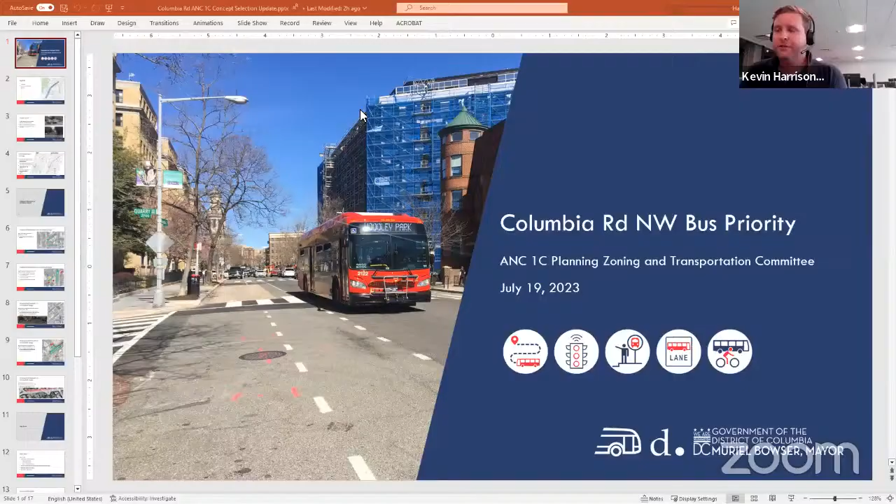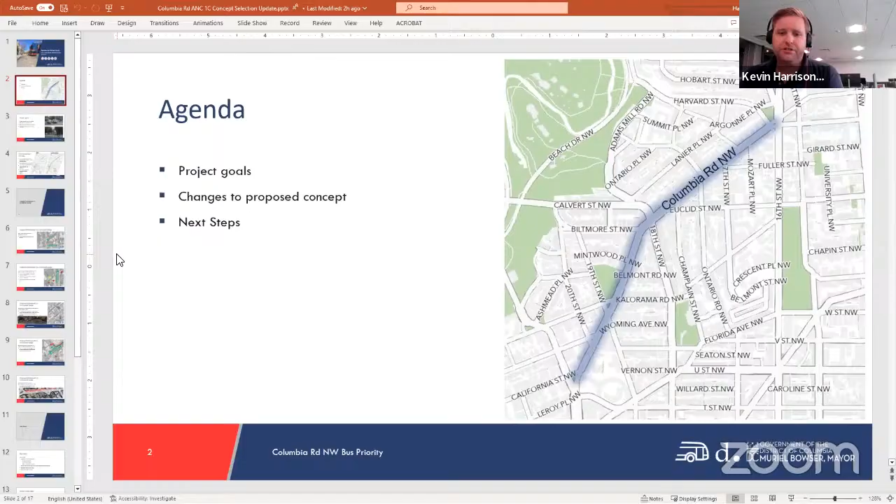So again, thanks for having me here this evening. I have a relatively short agenda for my presentation. Just want to reiterate the project goals. And the last time we spoke, DDOT was in the process of evaluating concepts. We've since selected a concept to move into design and then construction, and I wanted to provide an update on what's changed since then. For anybody who missed previous presentations, those are all available on the project website, and I encourage you to check those out for more information.

The first step in this project was a needs assessment in which we established what are the problems that we're trying to solve through this project, and what are the goals for this project. Something that we heard a lot through community feedback and through reviewing the crash records for all of the crashes that have occurred on Columbia Road was that people would like to see improved safety for vulnerable roadway users. When I talk about vulnerable roadway users, I'm generally referring to people walking and biking, because in every recorded crash involving them on Columbia Road, there was an injury that resulted. That's what makes them highly vulnerable.

Also, we want to reduce travel time for people riding the bus. The average travel time for buses through the corridor is less than 6 miles per hour. It's one of the slowest corridors in the district for bus riders, and they number about 6,000 people, between the various Metro bus lines plus the circulator line that run through this area.

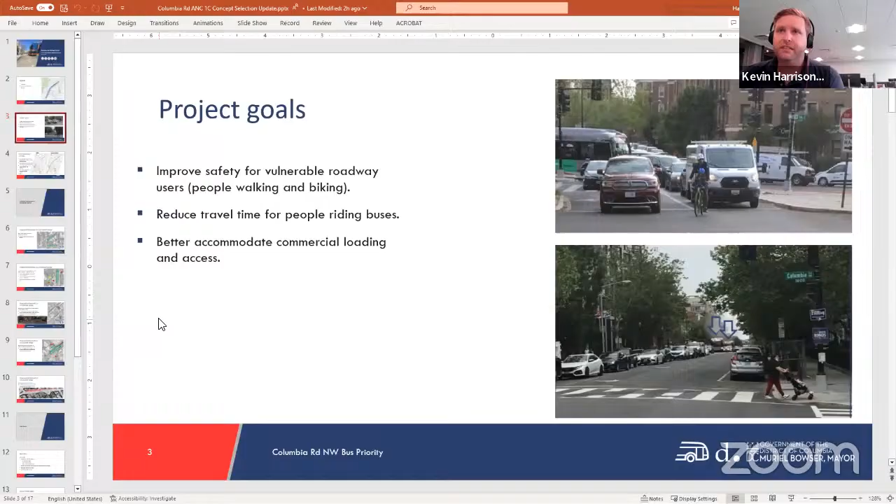The other thing is that we would like to better accommodate commercial loading and access through the corridor. Something that was also frequently cited in public feedback was that trucks unloading in the center of the roadway really limit visibility. There's at least one recorded crash in which a freight delivery person was hit by a car in the process of doing their job. So we want to make sure that, to the extent possible, there's space accessible for people who need to access businesses along the corridor.

A little preview in terms of proposed revisions to the design: there's some changes in the extents of that bus lane, but that's the general idea that we're moving forward with.

I wanted to provide some detail on some of the different refinements that we're proposing to the conceptual design at this point. We've done a lot more traffic analysis since the concepts were initially developed, and in selecting a concept to move forward, that was informed by some extensive traffic analysis.

One of the important things we wanted to look at is whether it would be feasible to have this protected bike lane connect all the way to 15th Street, where there's an existing bike facility. Making this connection between 16th and 15th Street would be important for completing this network connection. We're always working to expand the network of safe bicycle facilities in the district, and for the time being want to complete this connection. That was deemed feasible through our traffic analysis.

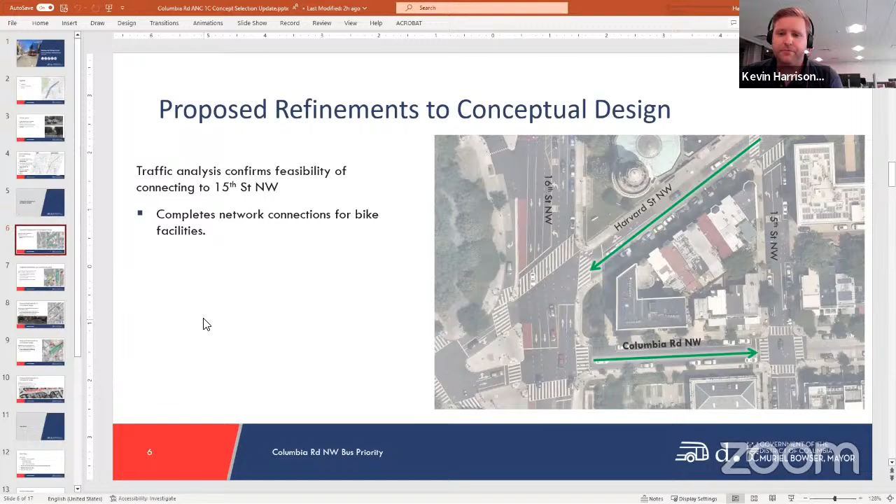However, it will have some parking impacts, so there will be more focused public feedback and outreach. That involves a neighboring ANC, ANC 1A, so we'll reach out to them and some of the properties along these two blocks.

The other thing we looked at was a major source of delay for buses making the left turn onto Little Harvard. Sorry, this is a little bit in the weeds, but I wanted to give you an update on what we've been working on.

The way Columbia Road works right now when heading east is that when 16th Street has green lights going north and south, there's a red light at Little Harvard, the little jog around the park that connects up to Mount Pleasant.

That's a red light, so you're not allowed to make a left turn there currently. We're proposing a permissive left turn at that intersection so there's no conflict with Columbia Road, since it's stopped, but people will be able to make the left turn watching for cars coming off of 16th Street. Right now there's often not a gap big enough for a bus to make a left turn there. So we're adding this permissive phase where there will be a flashing yellow arrow while Columbia Road has a red light, same as it does today.

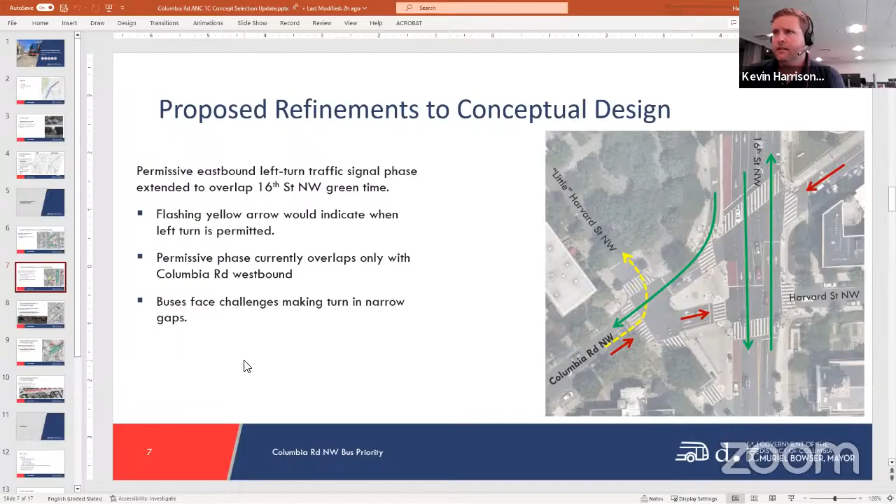One of the other things we're proposing at this point: south of Columbia Road, Ontario Road is one-way northbound, and on the north side of Columbia Road, Ontario Road is two-way. We are proposing to make it one-way northbound as well.

The reason for this is that it will simplify the intersection operations. Right now, because it's an offset intersection where the two sides of Ontario Road are not aligned, we can't run both sides at the same time in one signal phase. So we have to have a signal phase just for the south side of Ontario Road, and then another phase just for the north side.

If we make them both one-way, we can have one signal phase to let traffic move through Ontario Road. That will allow us to shorten the cycle and reduce wait times for pedestrians and people biking. Right now it's a confusing place to walk through because, as a pedestrian, you feel like you should be able to cross some of these streets, but it's unclear what the conflict is. Under this proposal, it would be a lot more clear.

Right now on the south side of Columbia Road on Ontario, you've got parking on both sides of the street, plus a contraflow bike lane so that you preserve circulation by bicycle. But for general purpose traffic, it'll be one-way northbound, and we would propose to do the same thing on the north side of Columbia Road.

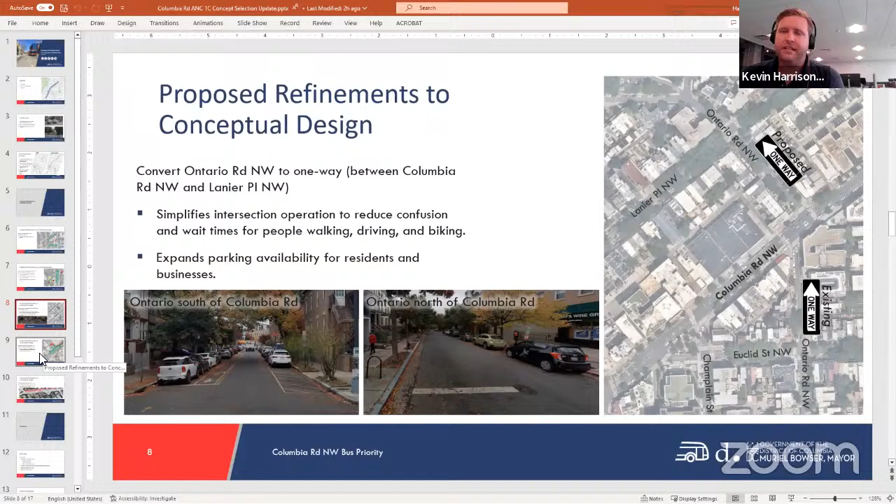Another refinement we're working on is also regarding traffic signals. What we're proposing is, at the intersection of 18th Street, Columbia Road, and Adams Mill Road on the north side of Columbia Road, to make it so that when Columbia Road has the walk sign for pedestrians crossing Adams Mill Road, and also when bicycles are able to cross Adams Mill Road, right turns will not be permitted.

Right now it's a permissive movement, it'll become a red arrow. You can currently make that right turn, you just have to yield to pedestrians. We are proposing to prohibit it so that there's less confusion.

That right turn will predominantly occur at the same time as Adams Mill southbound can make the left onto Columbia Road, similar to how it is now—they currently have that protected phase. But this will make it so that they're not also trying to get across while people are walking across the street.

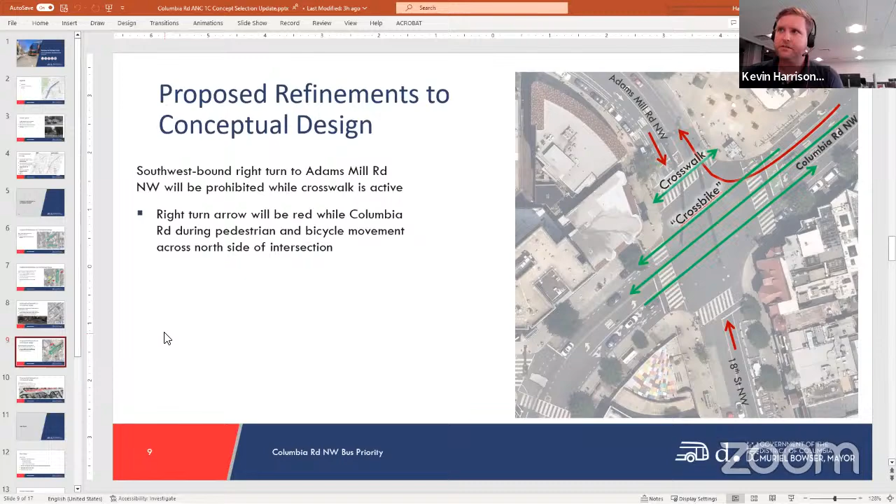One of the final major changes to the proposed design for Columbia Road is in the traffic analysis. We looked at how long the queues of traffic heading southwest on Columbia Road are expected to be in the future condition, and it's projected to be about 700 feet, which takes you back to between 20th Street and Wyoming Avenue.

So we are proposing to have that be the place where the shared bus and bike lane starts. What was previously proposed was at Kalorama Road, as you saw in that previous slide. But based on this analysis, it looks like we get the most bang for our buck by having it start at Wyoming.

I wanted to talk a little bit about what are the next steps for this project. Right now we're working on the 30% design, which is when a lot of the crucial things of particular interest to the public will be completed. In order to do that, we need to complete a roadway survey that will inform the drainage impacts and other things associated with this construction.

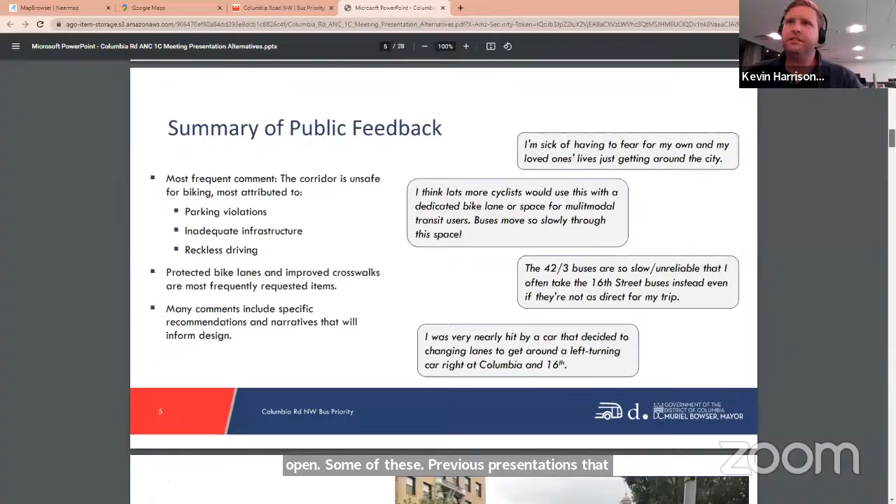Yeah, and while we're here, can you still see my screen, the Chrome browser? Yep, we got that. Okay, I was going to go ahead and open some of these previous presentations that provide more information on this. This is regarding the concept evaluation that we did.

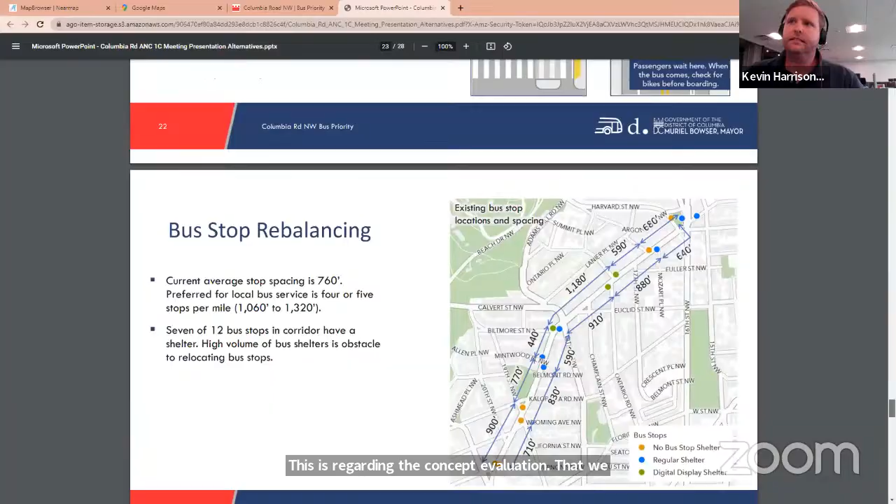And there's some information on the spacing between the bus stops on Columbia Road. What we're proposing as best practice for bus stop spacing in this sort of context with local bus service is under a quarter mile between each stop. A quarter of a mile is about 1,300 feet.

So we are still well within that maximum approximate range. Some of these stops are getting more spaced out. The longest distance, between 18th Street and 17th Street, is 1,270 feet. And the distance between the stop at Ontario and 16th Street is about 1,280. So it's within that threshold, and it's for good reasons relating to keeping up bus speed and reliability, and also taking into account where we already have bus shelters, trying to preserve those stops that will be near bus shelters and where there's next bus arrival information, to the extent possible.

Great, thank you. And just a couple more questions. One of the statements made by the Citizens Association was that the plan admits it will not decrease travel times through Adams Morgan by bus. But that is in fact one of the primary purposes of this plan, is it not—to decrease the travel time through the neighborhood by bus?

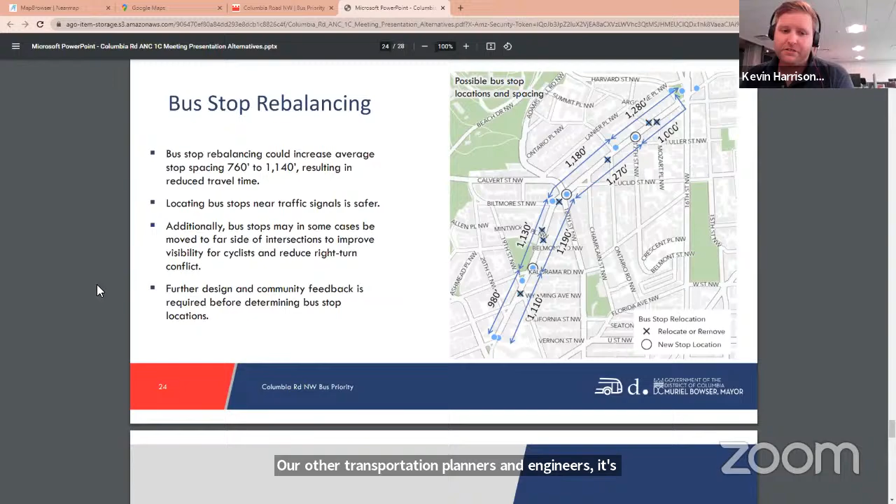I wish we could do more. It's severely congested between 18th Street and 17th Street as well. But in my experience and in the experience of our other transportation planners and engineers, it's very difficult to change the way freight loading happens on streets, and there's really not much opportunity to expand the bus lanes farther than where we have provided them.

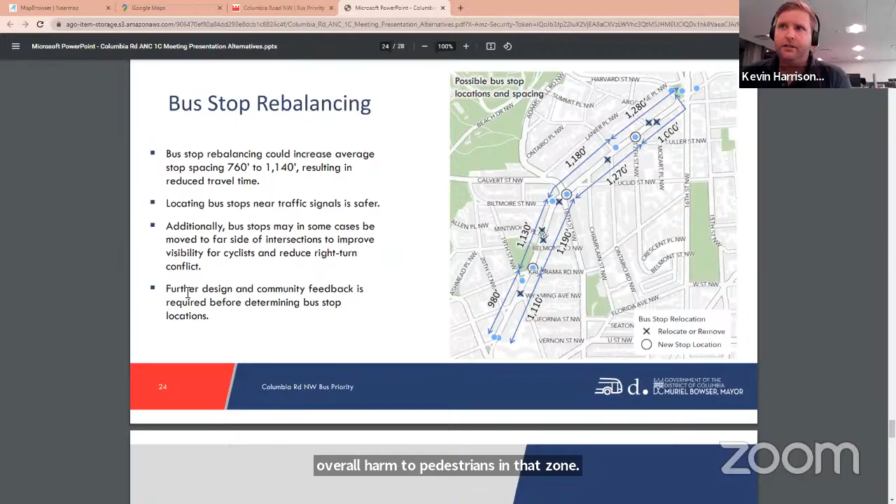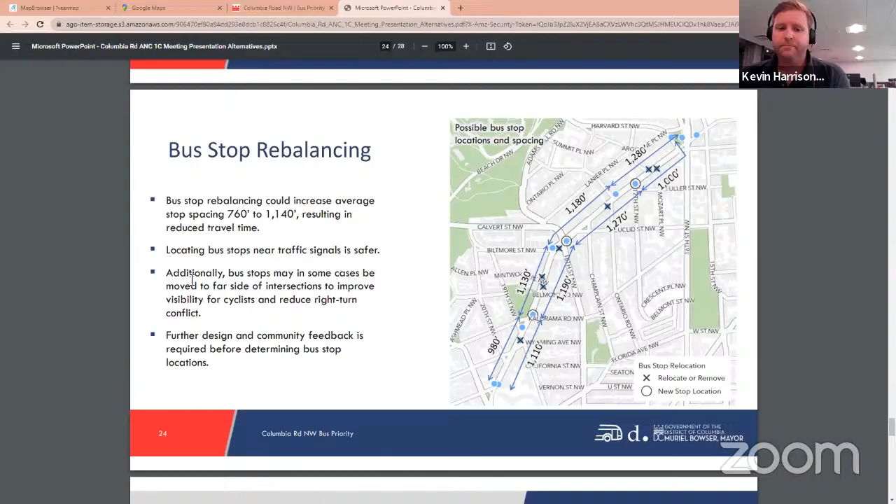Thanks, Kevin. One of the other comments is that the plan will put pedestrians at risk of collisions with bicyclists, scooters, and other personal mobility devices. Is there any evidence that where dedicated bike lanes have gone in the city, it has increased overall harm to pedestrians in that zone? There is not. In every city that has studied this, crashes go down—not just for people biking and on micromobility devices, but also for people driving and walking. In every study, it's reflected that the street becomes safer.

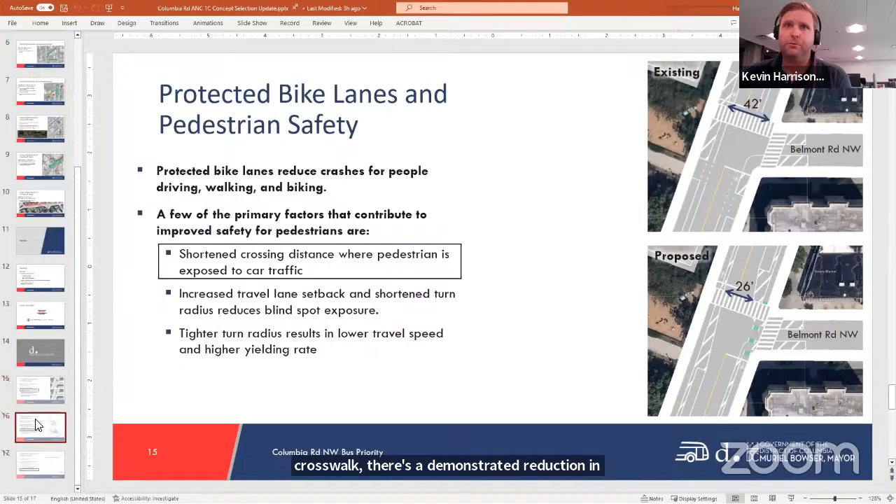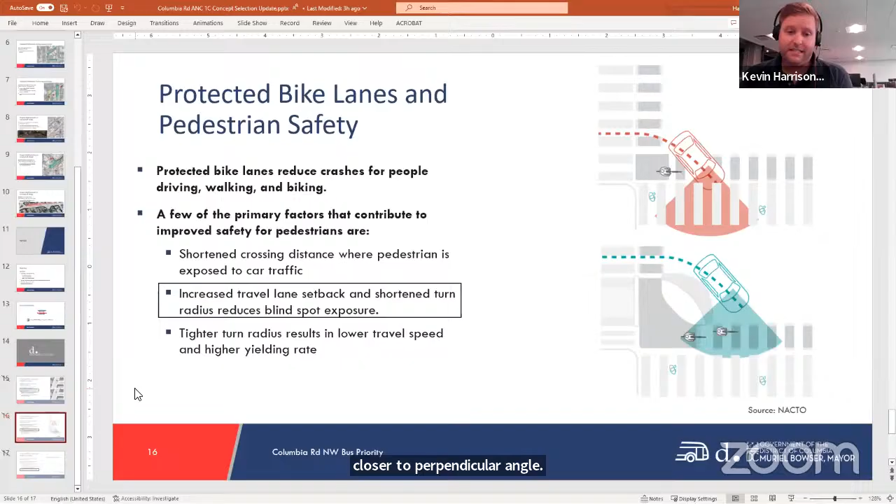The other thing is that the travel lane is set back farther from the crosswalk, so the car approaches the crosswalk at a closer to perpendicular angle. There's greater visibility of that crosswalk because it's making the turn from a greater distance from the side of it. And the other thing is that it results in tighter turn radiuses. When you shorten a turn radius, cars are going slower. And when cars are going slower, that alone reduces the probability of injury, and it also increases the rate of yielding—so you're less likely to have a car collide with a pedestrian or bicyclist in the first place.

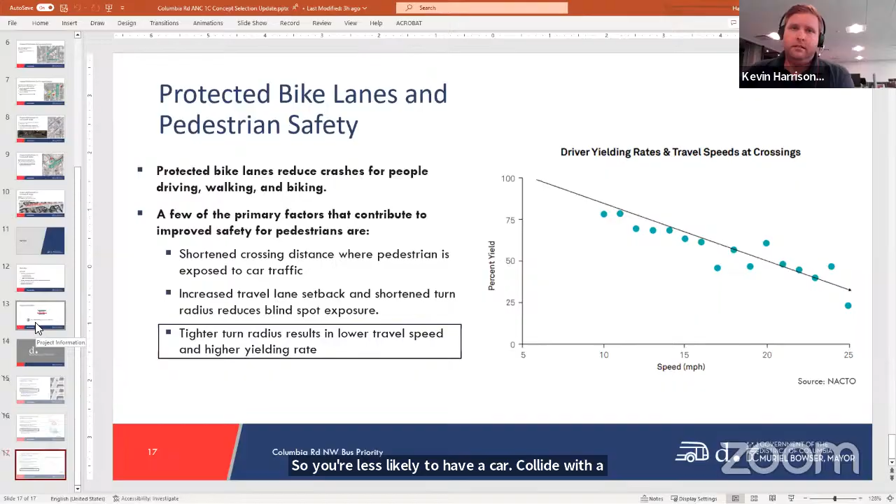Got it, thanks Kevin. So all the evidence tells us, at least the evidence that we have, is that this will increase pedestrian safety, increase the speed with which folks on buses can get through our neighborhood if they're taking public transit. We'll make it safer for people to ride bikes in our neighborhood and use that as their primary source of transportation. And we'll provide a very necessary east-west corridor through the city, linking various bike lanes together, which also happens to reduce our carbon footprint and meet many of our climate goals as a city, and will give us lots of opportunities to increase pedestrian safety along this corridor as well. Did I pretty much capture it there?

Yeah, I think so. Really emphasizing the safety aspect of this project. I recognize that there is high demand for parking in this area and that there is not much parking available. But we also have to acknowledge that there is a pattern of people on bikes and people walking being hit by cars. As the Department of Transportation, we have a responsibility to try to help that situation, even in places where there is a scarcity of parking.

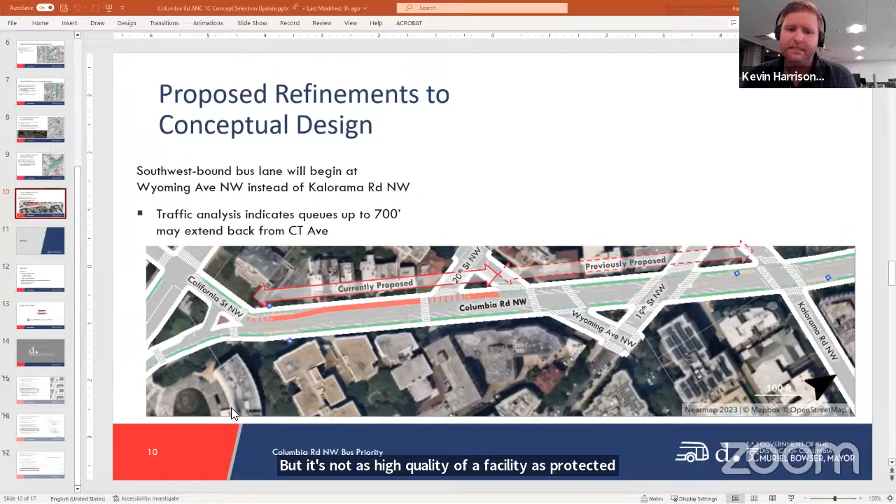The bus and bike lanes, I think people feel very comfortable in them, but it's not as high quality of a facility as a protected bike lane in terms of attracting users of all ages and all abilities. So that's a trade-off as well. We're watching this closely, and that's something we're working on in the coming months as we design this facility, determining exactly how long it's appropriate to build, or what is the appropriate length for this bus and bike lane.

I just want to make sure I understand the drawing here. On Columbia between California and Wyoming, will there be parking or areas for drop-offs or deliveries on either side? Sorry, between Wyoming and California, the stretch where it's effectively the shared bike bus lane.

So in this illustration — and this is conceptual design stuff, we haven't completed survey, the details are not final, but it's just illustrative — it does show parking on the northeast bound side of the street, pretty much existing condition, starting after the bus stop on the northeast bound side, which is the bottom of the screen. On the top of the screen, there's parking shown between Wyoming and 19th Street, but there is not parking between Wyoming and California Street.

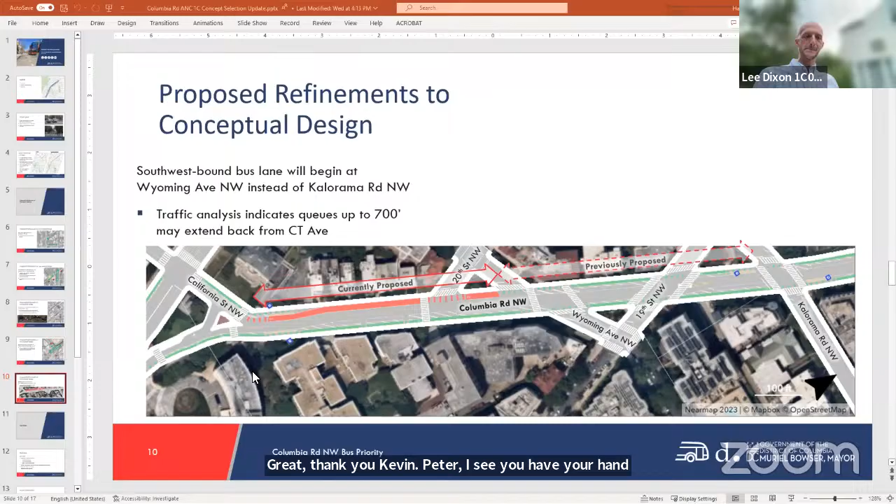Great, thank you. I wanted to raise a couple of things. One, on the southeast side of the road, the odd numbered blocks where the protected bike lane is proposed - our concern is that we're at 2006, and the alley runs between our building and the Schuyler Arms back to the Adams Oyster School. Our concern is that by pushing parked cars further out into Columbia Road, you're actually reducing visibility for traffic coming in and out of the alley. There are a lot of service vehicles for the school that come in and out, and heavy trash trucks that come back to the school and to the Wyoming. No loading is permitted in the alley, mind you, because it's a fire lane. So we have concerns, particularly for vehicles that have to back out into Columbia Road - their visibility will actually be obstructed by this, not improved. We need to take that into consideration.

Also, we'd like to know what is the plan for construction of this protected bike lane? Is it Jersey barriers? Is it flex posts? What's in mind here? All we see is a green line.

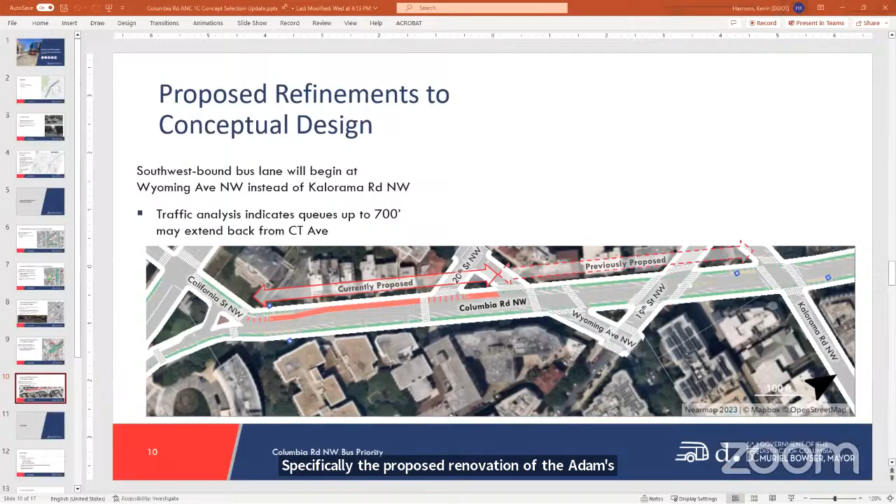Specifically, the proposed renovation of the Adams Oyster School and the redevelopment of the Universal North and South buildings. To our knowledge, no provisions have been made in the plans for either of those projects, or for this project, for adding any parking. So we're concerned where are construction workers going to park? Doing this project at the same time is going to make a bad situation even worse.

I appreciate you flagging that concern. As I mentioned, there's also additional construction coming next year on the Connecticut Avenue streetscape project. That's been called into question, hasn't it? I believe they're proceeding in 2024. There's also the Connecticut Avenue bike lane project farther north, north of Calvert, north of Woodley Park—that might be what you're thinking of. The one that's the deck over DuPont Circle, with protected bike lanes from DuPont Circle up to Columbia Road, should be proceeding next year.

When it comes time to schedule, we'll certainly be taking a look at all of that. This is a lighter lift. Our recommendation is that this be delayed for substantial rethinking and for consideration of that scheduling conflict. The thing about this project is it's considerably lighter construction—it's restriping primarily and using modular materials.

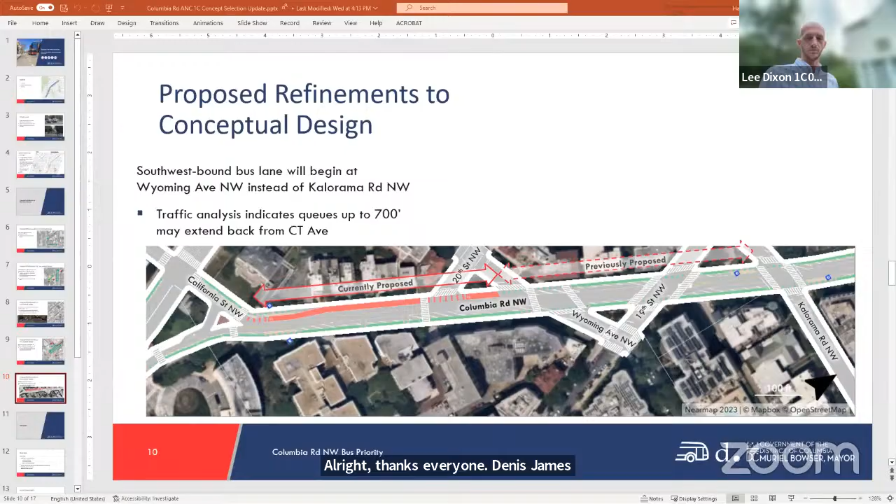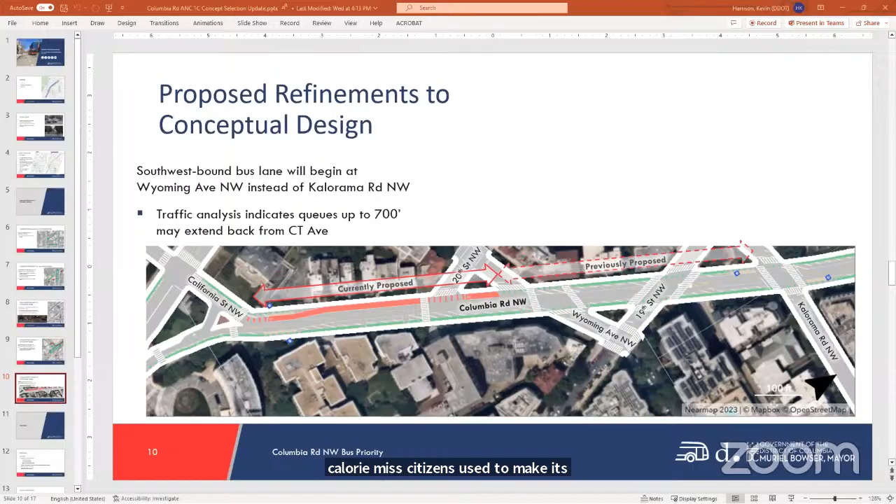So a question for Kevin, and I'd like to stay on after I hear his response. Actually, two points. Is it correct that pedestrians boarding buses will cross the bike lane to a concrete raised strip? And then, what is the situation on the commercial parts of Columbia Road between 16th and 18th? My understanding from your first set of plans, which the Kalorama citizens used to make its initial comments—which I posted today because I haven't seen any other plans until now—is that those businesses are going to be hard hit by removal of parking. You could be sentencing those small businesses to death by removing the ability for their customers to park near them, particularly the ones between Ontario and Champlain on the southwest, opposite Safeway and CVS. So that's two points I'd like to hear the answer to, and possibly make a response.

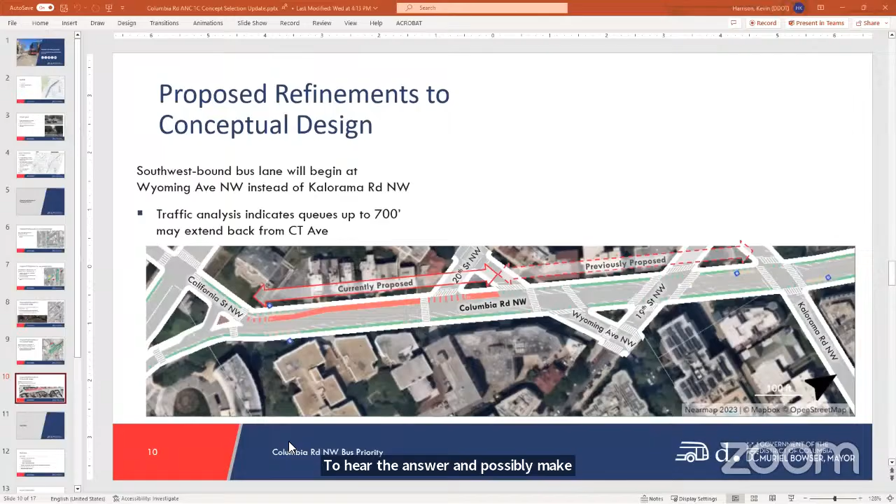Yes, these will most likely be what we refer to as shared stops, where the bike lane crosses the bus boarding area. It's a type of bus boarding platform we've been constructing in different parts of the district, and it's most likely what will be here. In terms of exactly what materials are used, that will be determined based on the survey that's going to be underway shortly.

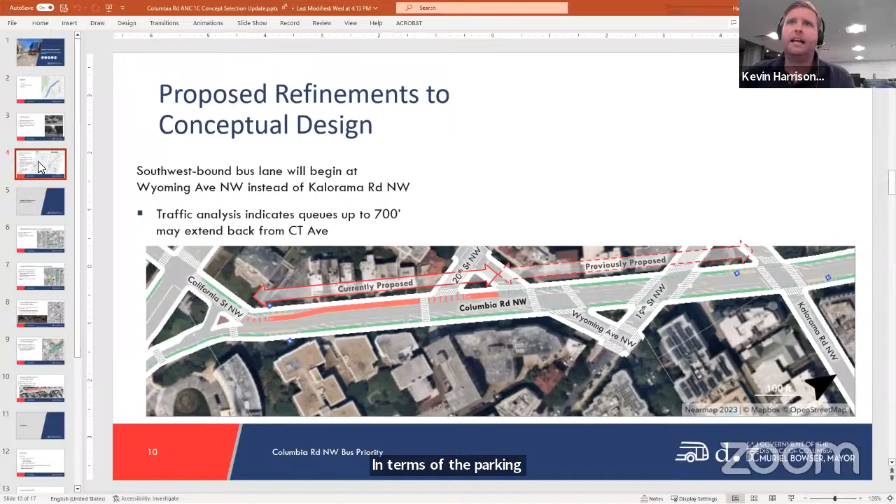In terms of the parking between 16th and—did you say 7th? I'm not sure which streets were your bounding streets for the question, but the proposal does remove parking between 17th Street and 16th Street. We're sensitive to the impacts of reduced parking along that stretch, and we're working with the business community on how best to accommodate their needs with curbside regulations on the remaining parking.

Okay, am I still being heard? Yes. Okay, thanks. So again, for Kevin—if I'm getting on a bus and a bicycle is coming along in the bike lane, what's going to make it stop? For me, especially with the idiotic rule the council passed, the so-called Idaho stop—say it's at a stop sign where the bus stop is located, or maybe a red light at a traffic signal—but perhaps the bicyclist can't see it because the bus is stopped right at the intersection. So it seems to me you're putting pedestrians at risk by making them cross the bike lane. And I've got to say, many bike riders are very entitled. They don't give a damn about anything—they just blast through stop signs and red lights all over the place, regardless of what's coming.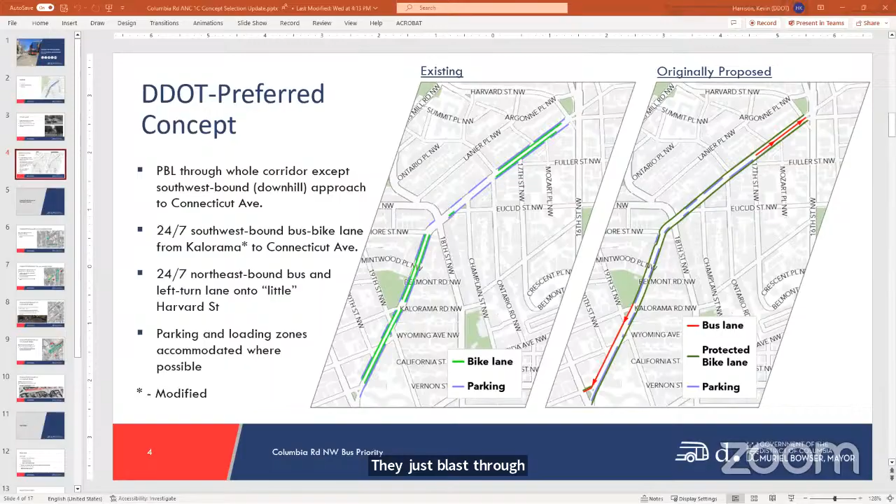Yeah, and that's a concern that we've heard from others as well. We've been attending meetings of the Accessibility Advisory Committee for WMATA, and also the equivalent for the district council, discussing the design for these shared bus stops with them. We've also been going out and doing observations, noting that this is something different than what's been constructed in the district before. At this point, our team has spent hundreds of hours actually making observations at these bus stops, taking seriously this concern that's been expressed. And there's actually very little interaction for the most part between people boarding and getting off of buses and people passing on bikes.

And that is the overwhelming thing. And then when there are those rare moments when somebody's trying to board a bus and a bike is passing at the same time, people get along and they yield to each other and they behave appropriately. We're posting signage at all of these locations, informing people that they need to stop for bicyclists. And there's also signage on both sides of the bike lane as you approach the bus stop, creating this gateway effect. There's a ramp up to slow down people on bikes.

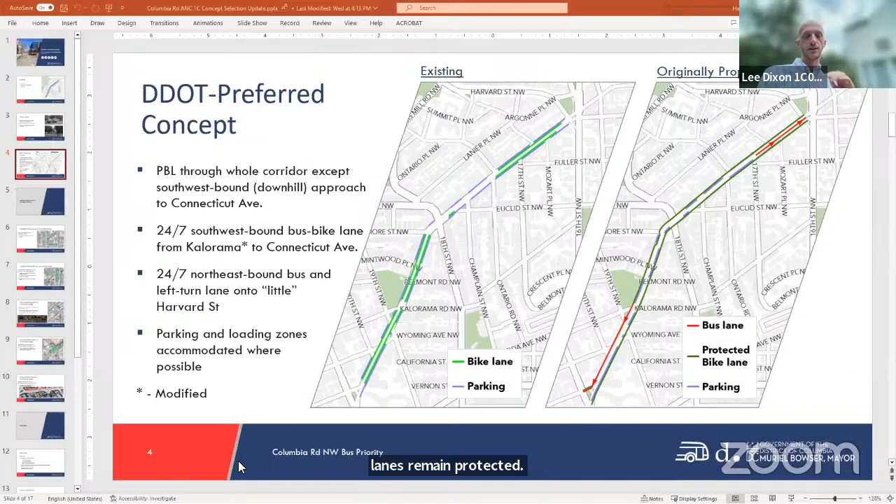It sounds like the best way to move forward is to contact Kevin directly about this project. And I think we've had a really fantastic discussion tonight, and have talked about some really important community concerns. I just want to make it clear, before this meeting, Kevin and I did have a lengthy discussion. I'd spoken to a few people who were on this call and other people within my SMD. And even between that conversation and now, there have been alterations to the plan that have been an improvement based on those conversations. So Kevin, thank you very much for being so amenable, and for being here and present and answering all these questions. We look forward to seeing where this project goes. And I hope that you hear from more people with their input so we can move this project forward in a helpful way for everyone.

Greg? Yes, Lee, thank you. Is there any future role for the ANC to be engaged in advocacy around some of the concerns that have been raised tonight? Thank you.

Kevin, my understanding is that we've already submitted the letter of support. I don't know, beyond you coming to these meetings, what the ANC would do if what you're seeking is community feedback, directly from people who are in this zone. Yeah, I mean, well, certainly I welcome the ANC's feedback at any point. Part of the formal notice of intent process is that you all are the recipients of that letter as the ANC. And any feedback that you provide during that comment period, the legal requirement is that it receive great weight. That's also a good way of describing it, is that it's very important to know the position of the ANC as elected officials at the most granular level representing the neighborhood.